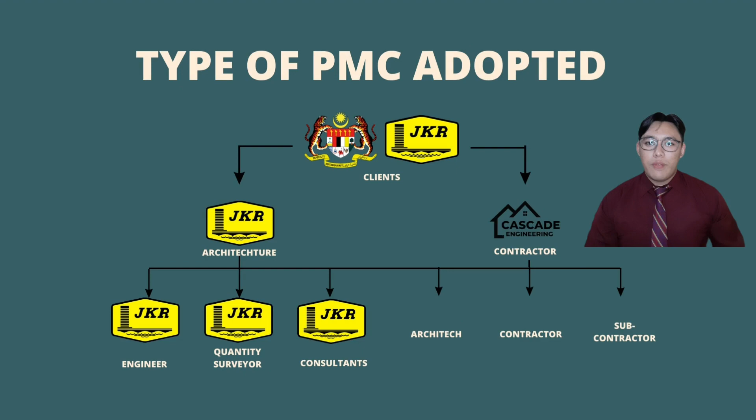Next, we are using the traditional method, and as contractors, we have full responsibility for everything happening on site. As I mentioned before, we use the design bid build method, which is commonly used in JKR procurement. In the design phase, JKR will appoint every detail of the project such as the design and specification. Later in the bidding phase, our company will be awarded the tender and execute the construction work after that.

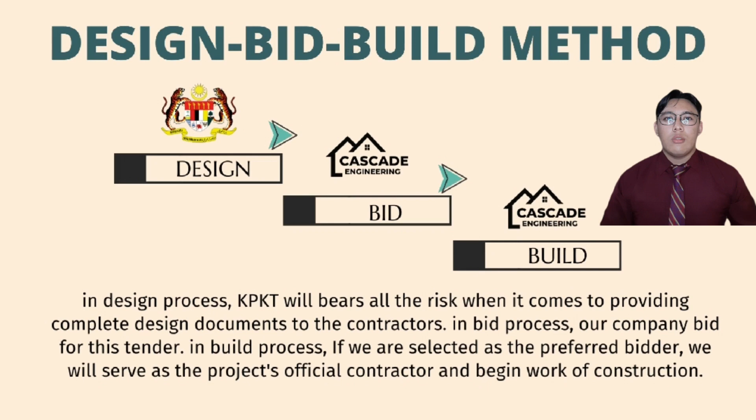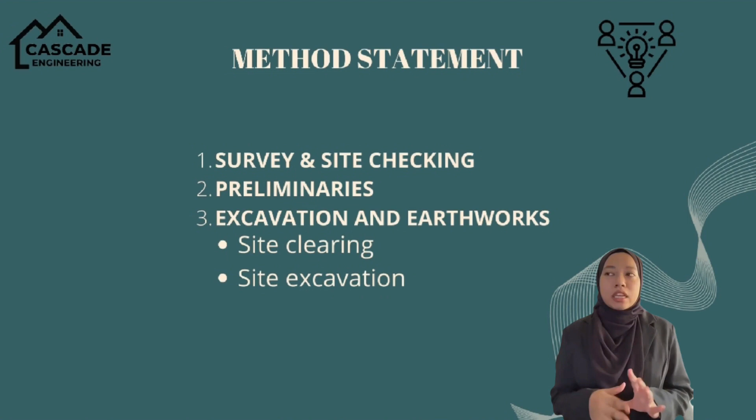Next, we have excavation and earthwork. For site clearing, the areas must be cleared of trees and bushes, and we will use a bulldozer to clear everything. Next, for site excavation, we must provide temporary water courses, ditches, drains, and pumps as needed.

Next, we have the main building and minaret. For the foundation works, we must confirm the proper design capacity by conducting a probe test as specified in the drawings. Next, we have reinforced concrete work.

For the formwork, prior to usage, all material brought to the site must be inspected for straightness, finish, and flaws. Next, for reinforcing, the soil, oil, rust, and other elements that can damage the bond between the concrete and reinforcement should be removed. Next, the concreting is in charge of evaluating adherence to concrete specifications.

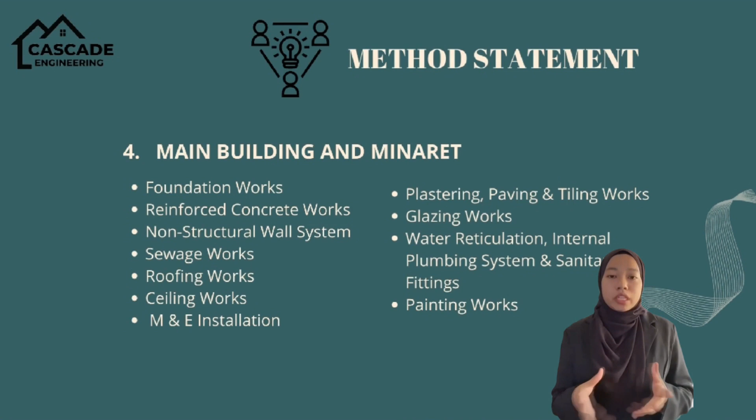Next, the non-structural wall system: we must use only cement, bricks, and hollow blocks from a reputable manufacturer. For the sewage work, we must only use pipes from SPAN or an approved supplier, and ensure the work is done in a safe, OSHA-compliant approach.

Next, for roofing works, we must ensure the roof is completely watertight. Next, ceiling works: prior to installation, the ceiling layout must be prepared to define the grid structure and directions. For M&E installation, due to the high complexity and personalized design, it must be performed by a highly technical and experienced technician.

For plastering, paving, and tiling works, the cement paving must be 20mm thick and made up of 1 part cement and 3 parts sand by volume. For glazing works, all doors and windows, except louvre windows, must be glazed.

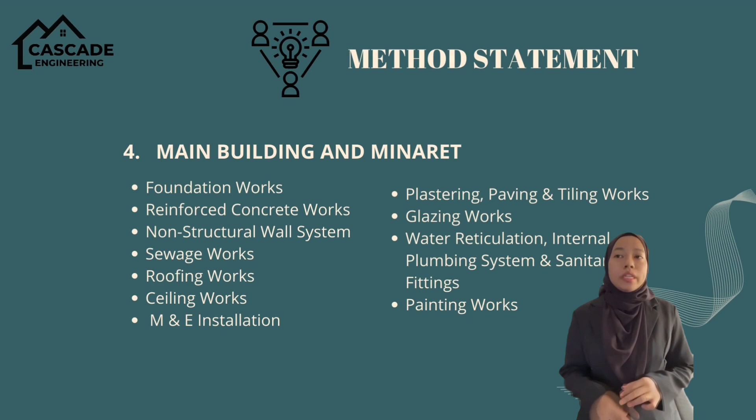For water reticulation, internal plumbing system, and sanitary fittings, we must provide the appropriate access facilities. For the painting works, the rust, scale, oil, grease, dirt, and dust must be removed from the areas to be painted. Next, for service facilities, the road path and car park.

The subgrade must be finished neatly and competently with embankment and cut width uniformly distributed. For the drainage work, we must set up the primary drainage system. Next, for the overall commissioning, ascertain that all systems and components are developed, installed, tested, operated, and maintained in accordance with operational needs. For the final checking, we must check for building code compliance in newly constructed and residential properties.

Last but not least, we have handing over. We must ensure that the client that her or his new asset is ready and safe to use, and that she or he is capable of operating, managing, and maintaining it.

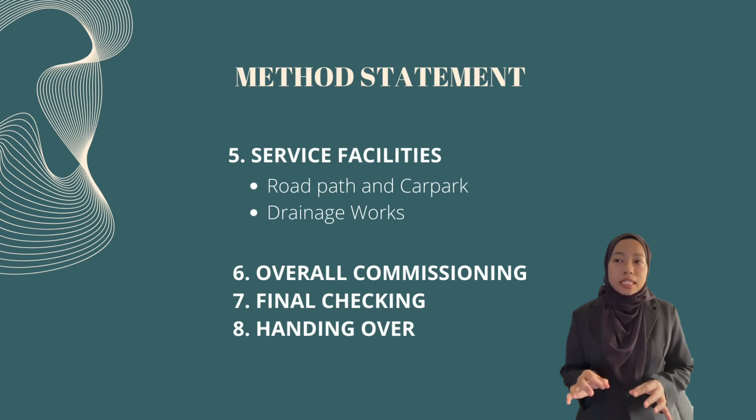Thank you. Next part, I will explain about the work breakdown structure, or WBS, for the construction of Masjid Kampung Pertama Seberang Perai Tengah at Pulau Pinang.

The work breakdown structure in project management and systems engineering is a deliverable-oriented breakdown of a project into smaller components. A WBS is a key project deliverable that organizes the teamwork into manageable actions.

The first point of the work breakdown structure is survey and site checking. Survey and site checking is inspection of an area where work is proposed.

Second, preliminaries. That means one-off cost or an ongoing cost of the project.

Then excavation and earthwork, which means removal of earth, rock, or material in connection with the construction. Site clearing is also part of excavation and earthwork. Next, site excavation. The next is foundation work.

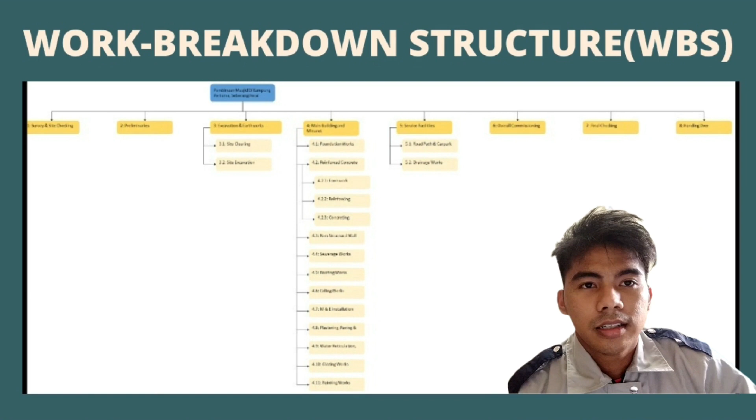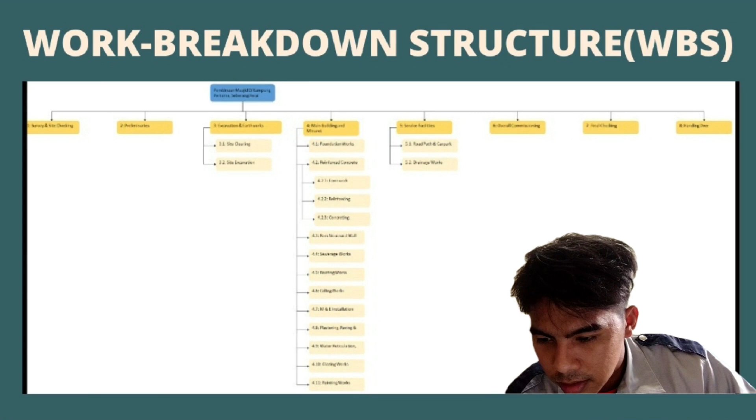The next one we have is service facility, like restaurant, roadside park, hotel, and others. In terms of service facility, we also have road path, car park, and drainage work.

The next part is overall commissioning. Overall commissioning is responsible for overseeing the installation of the system. Then we have final check. Final check is to make sure all the work plan follows the flow and there is no mistake.

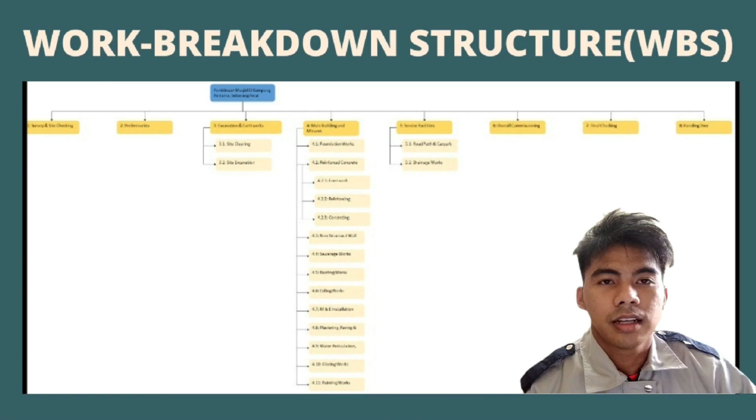For the last part, we have handing over. Handing over means giving something over to the control or possession of another. That's all for the work breakdown structure.

My name is Muhammad Faiz bin Roslan, and I will continue presenting about our project.

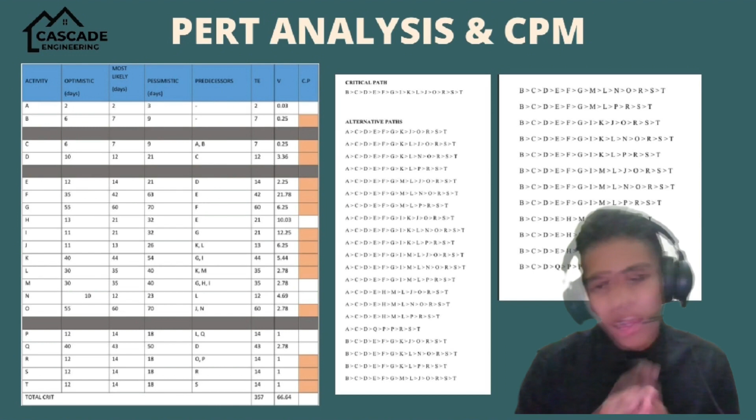To determine the probability of the project finishing, we use the PERT analysis. In this analysis, we use 3 time durations: A for the optimistic time duration, also known as the shortest time duration, B for the pessimistic time duration, also known as the longest time duration, and lastly M for the most likely time duration, meaning the activity that can be accomplished just like in the schedule.

With these 3 time durations, we can find the time expectation and variance of the project, followed by the critical path that we have set beside the diagram.

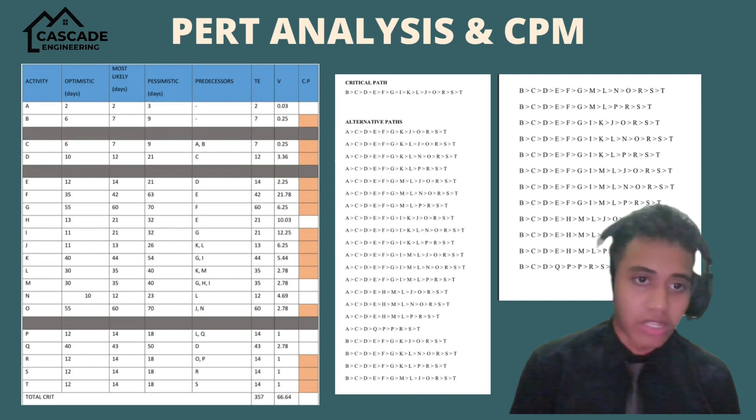So what the client wanted for this project is to be completed in 1 year, which is 365 days. The chance for the project to be successful is 83.65%, and the possibility to fail is only 16.35%. So we must make sure this project goes smoothly and exactly like the schedule to make sure that this construction project will be finished before meeting the due date that has been set.

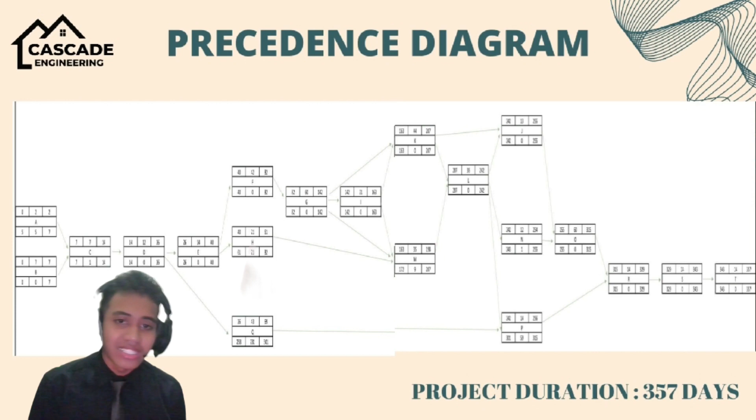And we can also see the flow of the work by constructing the network diagram, also known as the precedence diagram. From this diagram, we can get the overall duration of our project, which is 357 days, earlier than the due date of the project that has been set.

Hi, I'm Marisa, a planning engineer at Cascade Engineering. This is the list of activities of this project.

The duration of this project is 365 days. There are 8 stages for this project, the first being site survey or site checking. The duration of this activity is 2 days, starting on 1st June and ending on 2nd June 2022.

Second is preliminaries, which takes 7 days, followed by the excavation and earthwork stage. The activities for this stage are site clearing and site excavation, which take 7 days and 12 days for each activity. Furthermore, the main building and minaret is one of the stages.

The next activities are plastering, paving and tiling works, and water recirculation and internal plumbing. Next, glazing and painting work take 12 days and 60 days respectively.

Then, service utilities is the 5th stage in this project. The activities are road path and car park, and drainage works. After this stage, overall commissioning will be held for 14 days, which is on 12 April.

The final checking will be done and the project will be handed over to the client on the 10th of April 2023. The project will be finished on 23 May 2023.

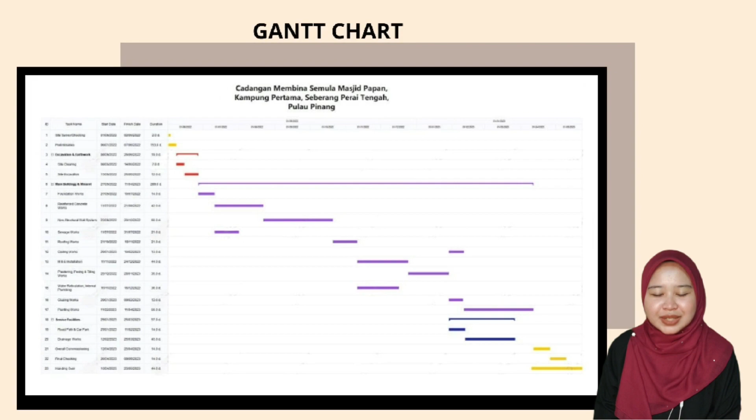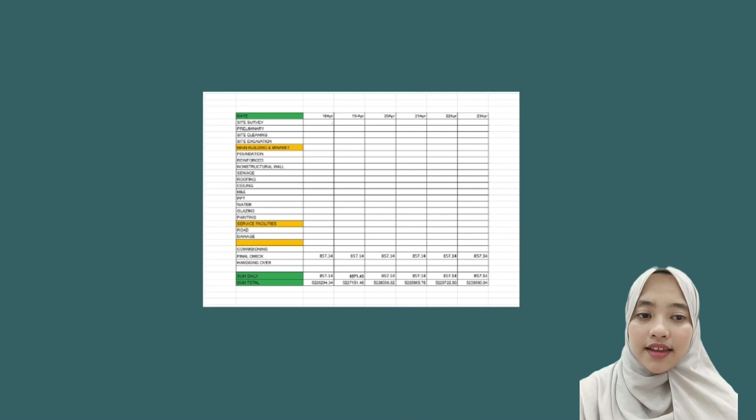From the S-curve, we can track the progress of the project and we can also know the budget and the schedule. The theory of the S-curve is that the more progress is made, the more the growth accelerates rapidly.

From our S-curve graph, we can see an upward slope in July and August. This is the maximum growth, and we can also see our cost exceeds 5 million ringgit in March.